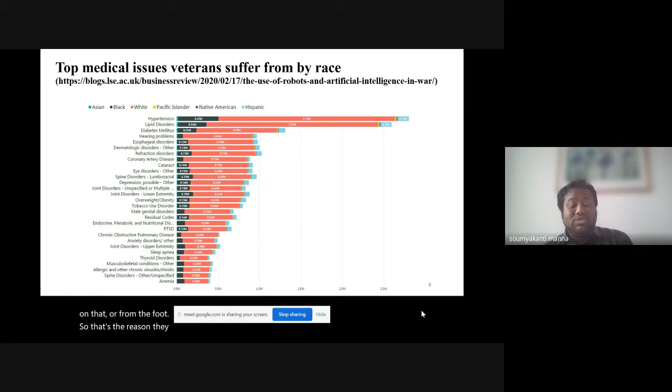At the same time, looking at the cost - to account for the increased lethality of war, a vast budget is required to maintain the active duty army. For example, from the US Army: simply recruiting a soldier costs around $15,000... that's quite huge, almost 10 to 12 lakhs in Indian currency. And the cost of treating an injured US soldier is about 2 million a year - that's from a journal in 2014.

If we look at the Indian military expenditure, last year it was 72.9 US billion dollars, where a large chunk of the Indian defense budget goes towards the salaries of around 1.4 million serving personnel.

So the question I raised at the beginning: can we replace those personnel with robots? Because as you can see, we have to spend a lot of money only for the salaries and for the pension. That's some statistics from 2017.

For example, 67% of the defense budget went towards those heads, and only 33% was spent on new acquisition of hardware and equipment. So then the question comes - if we replace those soldiers with robots...

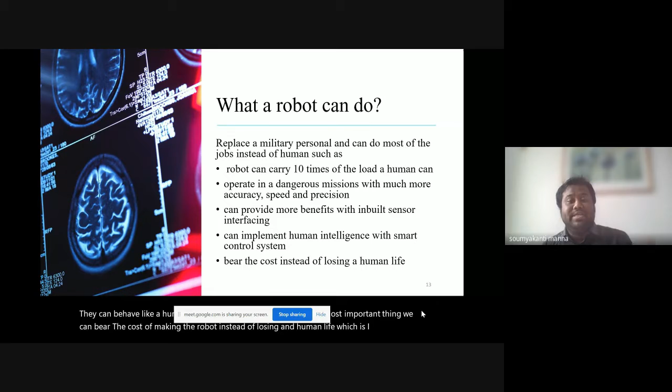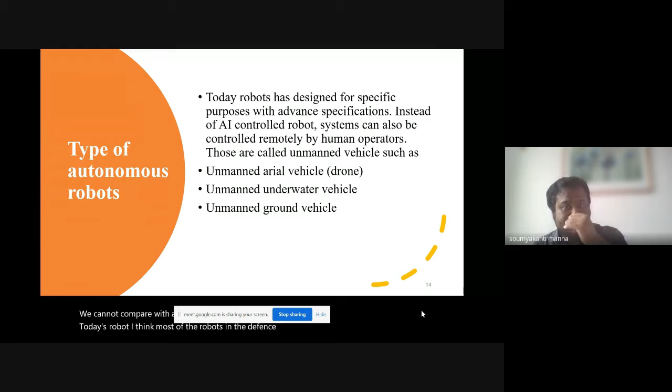Today's robots, most in the defense or security sector, are normally designed for specific purposes with advanced specifications. Sometimes instead of a fully autonomous AI-controlled robot, we have systems controlled remotely by human operators situated somewhere in a ground station.

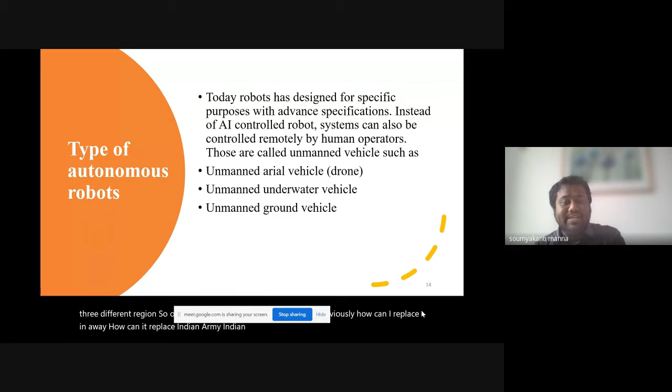We can divide these unmanned vehicles into three types: unmanned aerial vehicle, also called drone, unmanned underwater vehicle, and unmanned ground vehicle, based on three different regions - air, water, and ground. So how can these replace the Indian Army, Indian Air Force, and Indian Navy?

What are the components of a UAV, the unmanned aerial vehicle? There's the communication system, navigation, monitoring, obstacle avoidance system, and weather system. We are integrating a lot of smart features into it so that it can have much more intelligent behavior.

In terms of communication system, it normally uses ultra high frequency and communicates with the KU band system. KU band is the frequency from about 12 to 14-15 gigahertz, normally used by satellite communication. For example, it operates at an uplink frequency of 15.15 to 15.35 gigahertz, and a downlink frequency of 14.40 to 14.83 gigahertz.

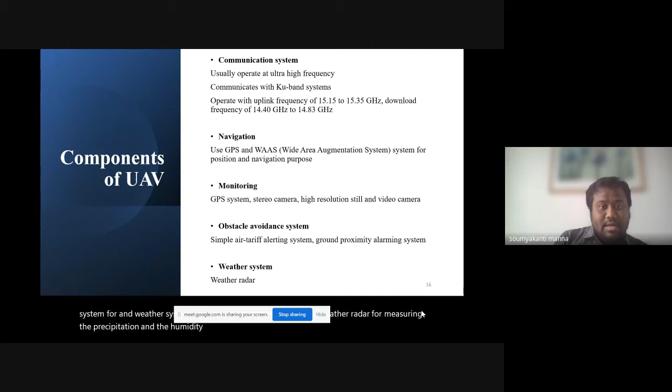For monitoring, we can use GPS, along with a stereo camera, and high resolution still and video cameras. The obstacle avoidance system includes a simple air traffic alerting system and ground proximity alarming system. For the weather system, UAVs normally use weather radar for measuring precipitation and humidity outside the UAV.

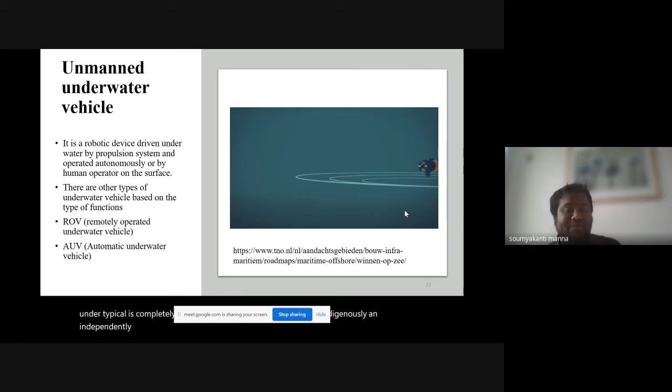So I'm going to play this video.

Deep sea operations can be more challenging than space.

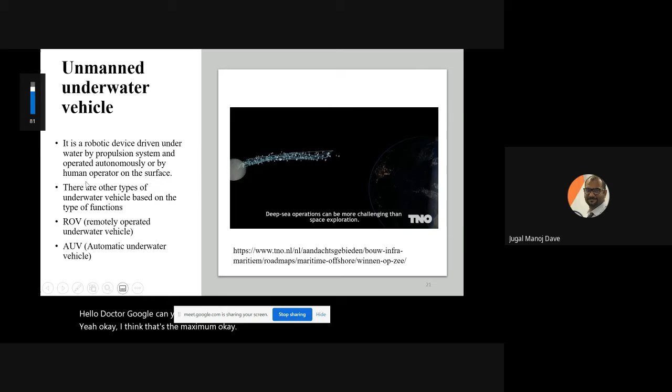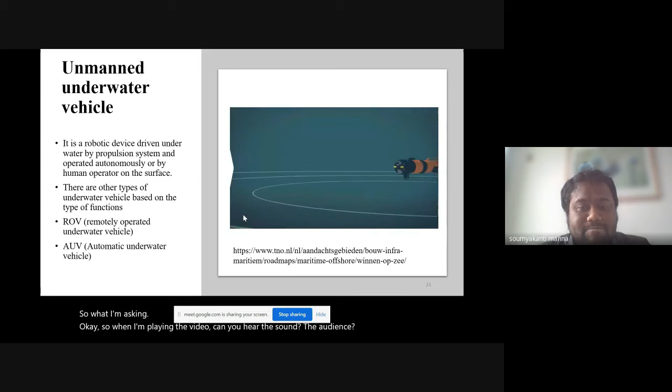Okay, before playing that video, may I ask Dr. Jugal, can you hear the sound? Yes, sir. The thing is, it's a bit low. Can you please increase the voice? I think that's the maximum. But we can hear the voice, so not a problem. Okay, so when I'm playing the video, can we hear the sound, the audience? Yes, yes, yes, we can hear the sound. Oh, okay, that's great.

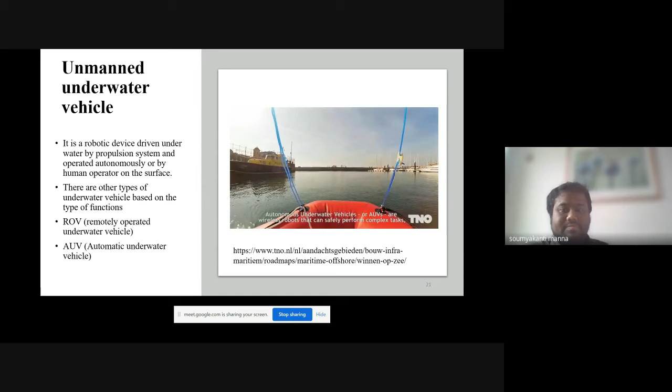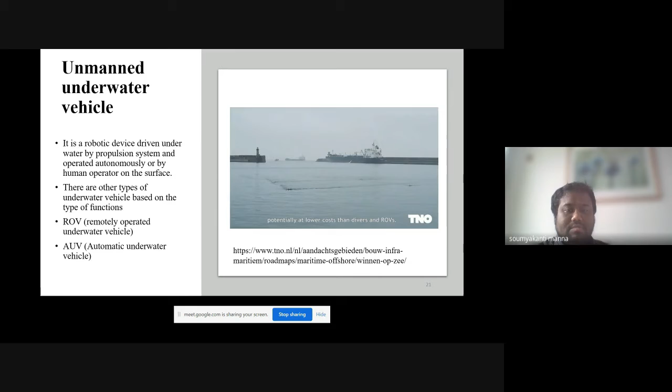Deep sea operations can be more challenging than space exploration. When astronauts sent messages from the moon, there was a 1.2-second delay before they were heard on Earth. Yet when aquanauts sent signals from the Challenger Deep, they took 7 seconds to be received. Only the most advanced technologies can help us explore this complex frontier. Underwater inspection and monitoring are essential for many industries. Operators deploy professional divers and ROVs, but their effectiveness is limited, especially at great depths or in rough seas. As maritime operations expand into deeper waters, more remote locations, or more complex conditions, operators need more intelligent, safer, more cost-effective solutions. Autonomous underwater vehicles, or AUVs, are wireless robots that can safely perform complex tasks, potentially at lower costs than divers and ROVs. At TNO, we apply key technologies that enable AUVs to be deployed for autonomous maritime inspection and monitoring. Let's explore how this works.

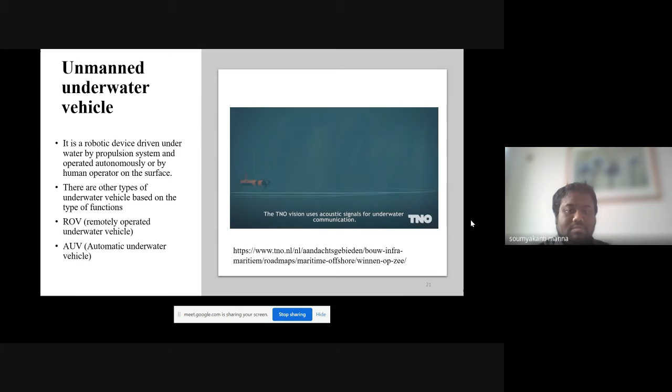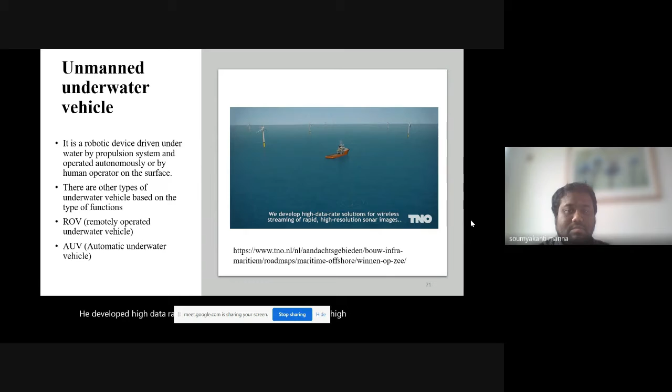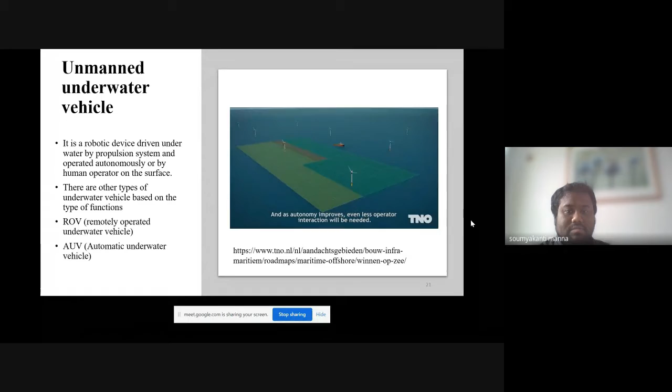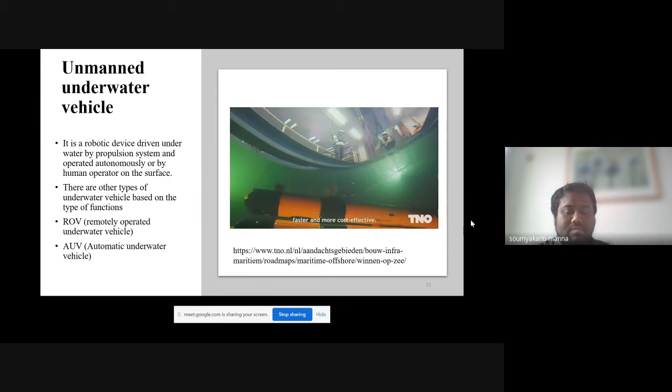The TNO Vision uses acoustic signals for underwater communication. We develop high data rate solutions for wireless streaming of rapid, high-resolution sonar images and compressed videos. We also created underwater modems and designed mission planning software to determine where to best deploy the modems to create a communication infrastructure. Next, we enable multiple AUVs to cooperate with each other. Now, we are ready to begin our mission. We use 3 AUVs to inspect a selected area of the seafloor. If one vehicle fails, another vehicle can take over its tasks, and as autonomy improves, even less operator interaction will be needed. With TNO, you can use the latest technology and AUVs to make your underwater operations safer, faster, and more cost-effective. Are you ready to deploy wireless solutions for your maritime operations? Get in touch with TNO Maritime.

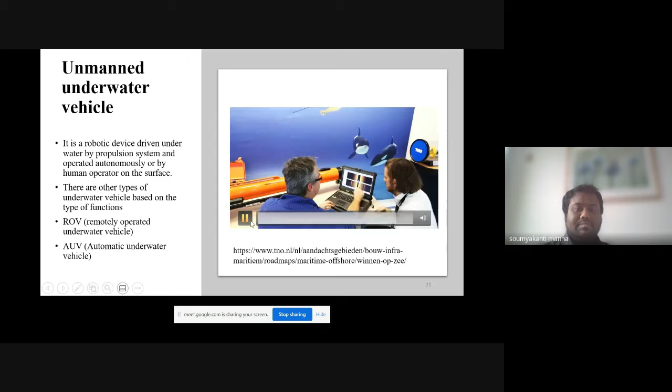So this is the AUV developed by TNO Maritime. I just want to show the working principle of this AUV system. As you can see, it is capable of surveillance, it is capable of monitoring, it is capable of doing small activities. With that advancement of technology, if the AUV can carry more payload, literally like other submarines, we can also launch attacks from this AUV itself.

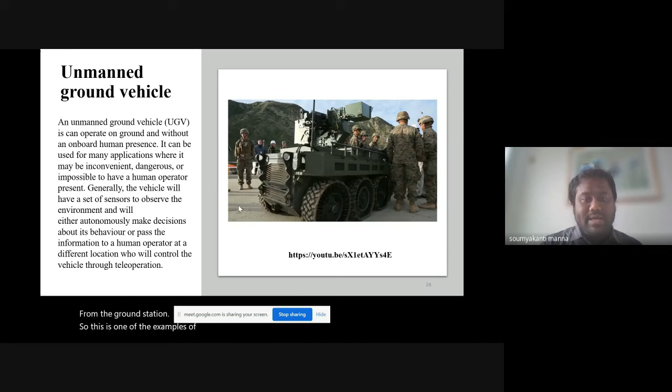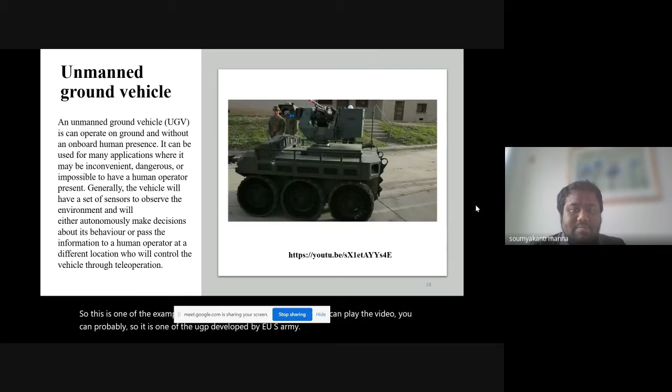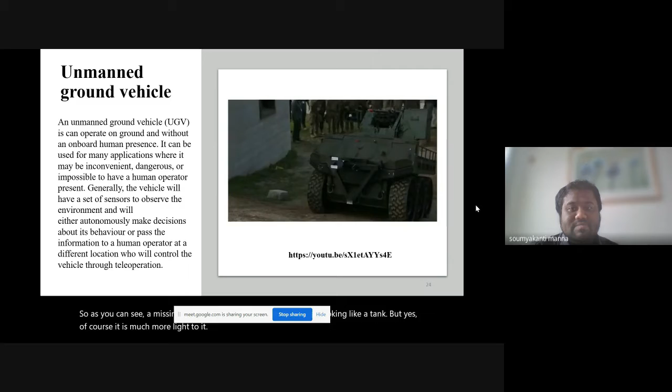I can play the video - this is one of the UGVs developed by the US Army. As you can see, a machine gun is fitted on top, so it's kind of looking like a tank, but of course it is much more lightweight. As you can see, it is remotely operated from an operator. If they have a camera in front of it, they can see the outside and track it as per the requirement.

It can also travel on uneven terrain, since in most cases the war zone and battlefield do not have a smooth surface. So obviously the vehicle should be capable enough to go over uneven and unknown terrain.

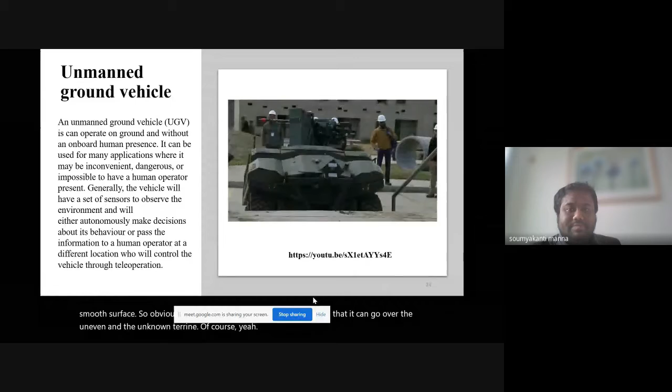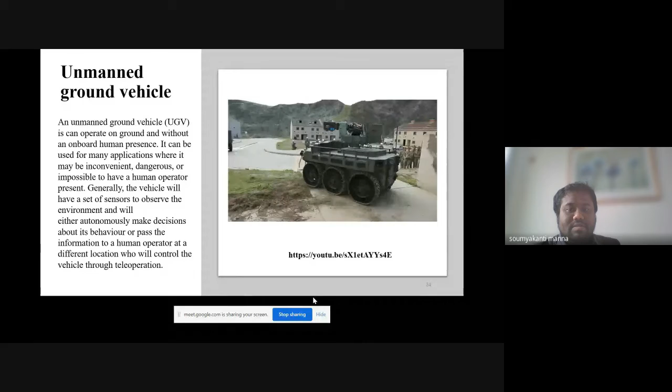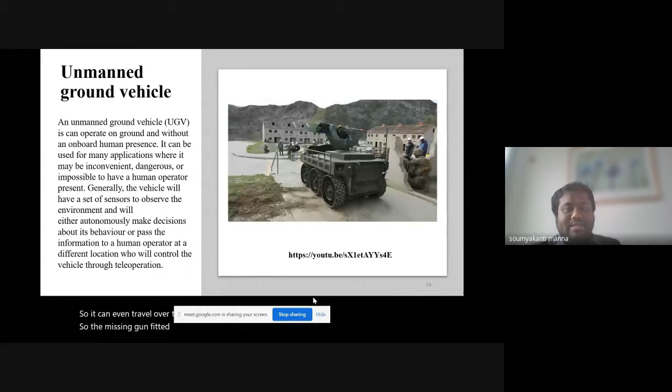It can even travel over stairs, like a human can do. It has a machine gun fitted on top, with another gun in front of it. Then there's an RGB and stereo camera with a radar positioning system.

A few features of the UGV: it mostly has a stereo vision camera that can measure the color image as well as the depth image, so we can also get depth information. Suppose an obstacle or enemy is in front of the UGV - we can measure the distance to it. It has a color camera, radar, radio detection system, and lidar, which is a laser detection system, having more advantage than radar. Then GPS, the global positioning system.

Most of the time it has an onboard CPU, the central processing unit, for mapping the landscape and controlling mechanical activities. If it is remotely controlled, information is transferred by radio signal from an operator through that CPU, and the CPU performs the action. But if it is autonomously controlled, meaning no human operator, the UGV controls itself independently, using a smart algorithm so that based on the situation it can take action.

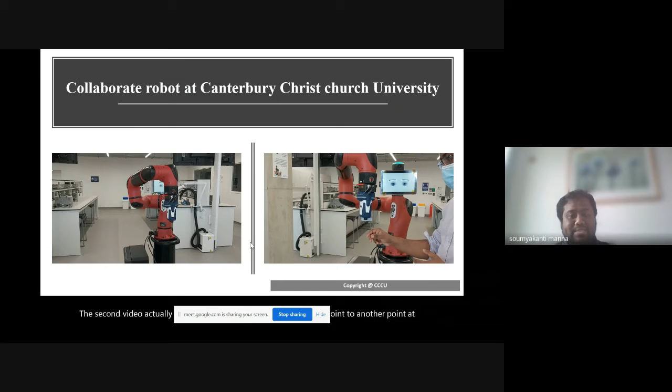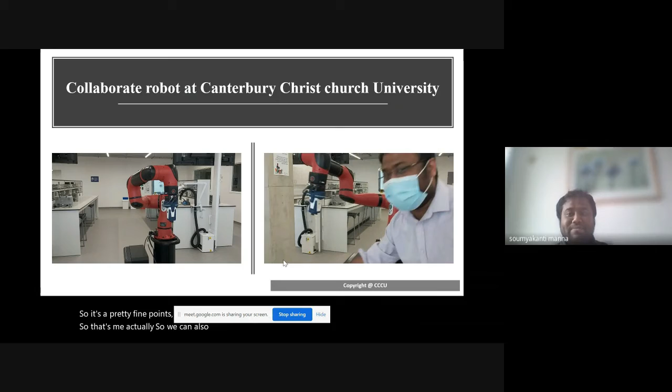Now the second video - it's not only moving from one point to another, at the same time it can pick and place a certain object. It's predefined points, but we can also program it accordingly, like tracking my human arm, my hand position, and it can pick that item from my hand and place it. So that's one of the robots we have.

We have almost two robots - one is this Sawyer robot, and another from Mitsubishi. We can use this even for defense purposes as well.

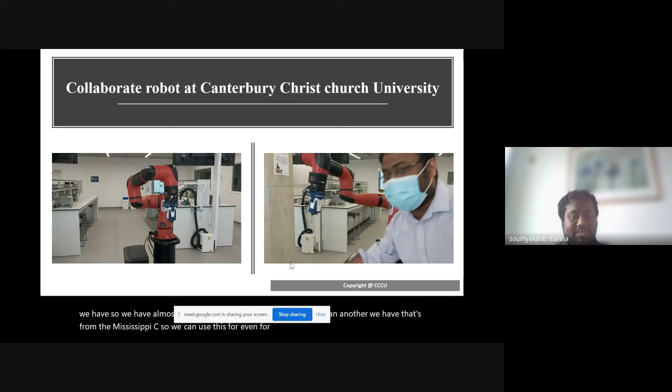If a person can lift, let's say, 10 kg of load, in the battlefield sometimes they have to carry a huge amount of load on their back or front for a few kilometers, or carry their wounded colleagues. For a normal human, your muscles become fatigued after a certain time, become tired, and drop - it's normal human nature.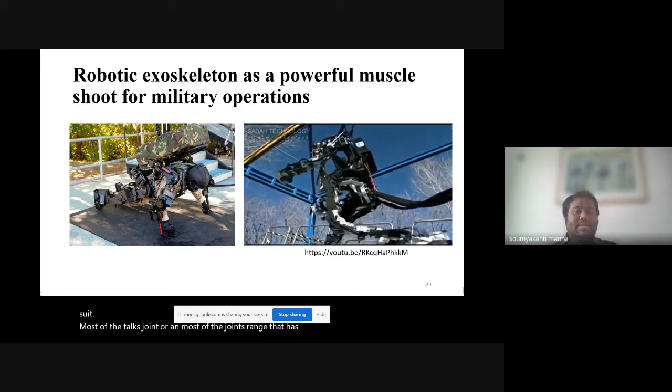But can you use a robotic suit along with you to enhance your strength? It's almost like making you a superhuman. If you can normally lift 10 kg, with this robotic suit on your arm or leg you can lift around 50 kg with ease. Similarly, if a soldier can travel 10 kilometers without tiredness, with this suit they can travel around 50 kilometers, because most of the joint torque and joint range is taken by the outer muscle suit rather than the human itself.

Let's play the video, then you can get an idea how it performs.

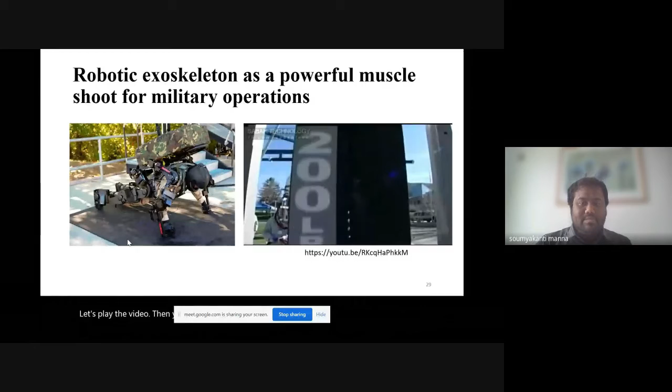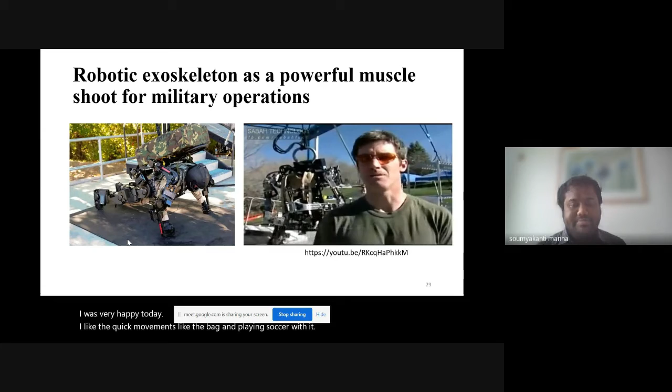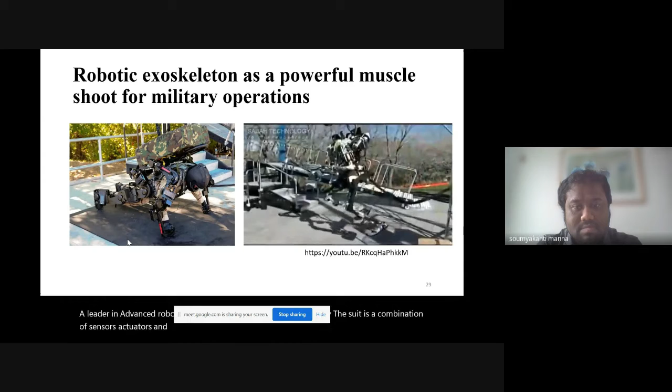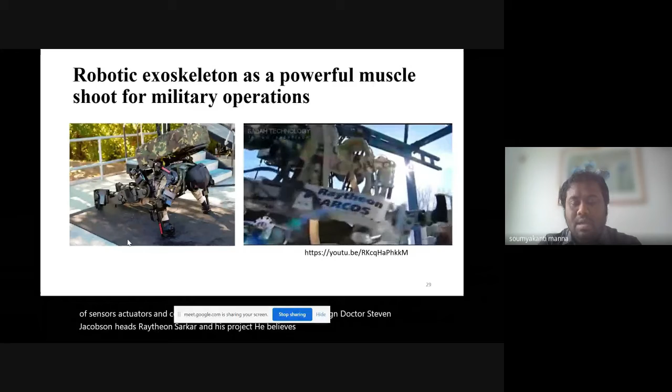Future - not too distant future. This is the exoskeleton, now being developed by Raytheon, newest research in Utah. The exo is a robotic suit that gives its wearer greater strength, endurance, and agility, just like the superhero depicted in comic books and Hollywood movies. Think of the exoskeleton as an amplifier. Raytheon engineer Rex Jameson says it's easy to use: 'It's very natural, you can get it today and walk around. I like the quick movements, like the speed bag and playing soccer with it. And some of the power stuff, it can carry a 150-pound payload, walk up ramps and walk upstairs.' Raytheon Sarcos, a leader in advanced robotics, is developing the exoskeleton for the U.S. Army. The suit is a combination of sensors, actuators, and controllers, all packaged in this futuristic design. Dr. Stephen Jacobsen heads Raytheon Sarcos and this project. He believes invention is a combination of art, science, engineering, and design.

Scientists, whatever, but it's not us—it's a process of getting together, understanding the problems, humans designing something to satisfy the needs. With the exoskeleton, Raytheon is not only satisfying a need, the company is pushing the boundaries of technology.

Science fiction will one day meet reality.

So as you can see, this is a kind of external muscle suit, and that is why it is called exoskeleton. So exo means outside, and skeleton means your human body. That's my research area actually, where I did my PhD.

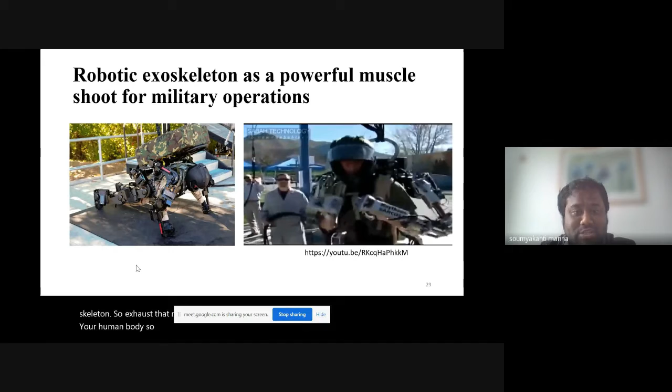The types of exoskeleton can usually be divided into two types. One is the ground-based system, for example Armin, developed by ETH Zurich. The other is the body-based system, for example Titan Arm, from the University of Pennsylvania—a kind of portable system the human can carry all the time.

These are the basic properties of a robotic exoskeleton: the functional properties, the technological characteristics, the financial benefits, and the psychological benefits.

The functional properties involve the structure of the whole body. Suppose we like to create an exoskeleton suit for a human person, we have to think about how the human body looks like.

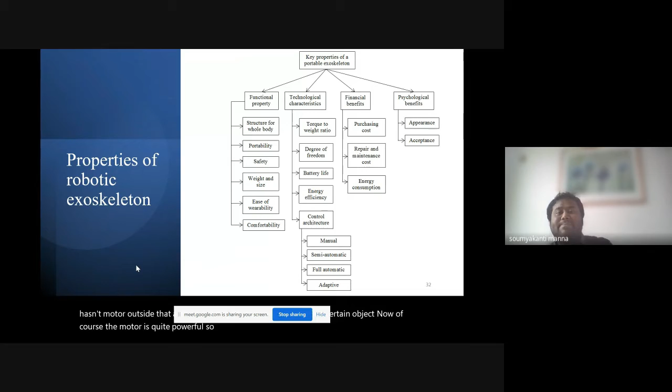Now, the motor is quite powerful, so if any malfunction happens in the exoskeleton, it can even break your whole arm or human joint. So instead of helping you, if something goes wrong it will literally make you paralyzed for your whole life. We have to think about its safety.

Safety in that sense, it should be safe electromechanically and through the soft computing. Electromechanically, we have to think about some limit switches, some boundary conditions in the mechanical actuator. At the same time, whenever we are programming this robotic exoskeleton, we have to program it so that it may not go beyond a certain boundary.

The weight and size matter too—if it is too much weight, even the users cannot carry it, then there's no point developing it. And the size itself needs to fit that human body.

Ease of wearability—suppose a soldier is carrying it for 8 hours long, it needs to be wearable, because otherwise after 1 or 2 hours it becomes painful for the user. They may not use it in the battlefield, because sometimes the soldier needs to spend more than 3 or 4 days outside without food or drink, so the exoskeleton needs to be wearable by them.

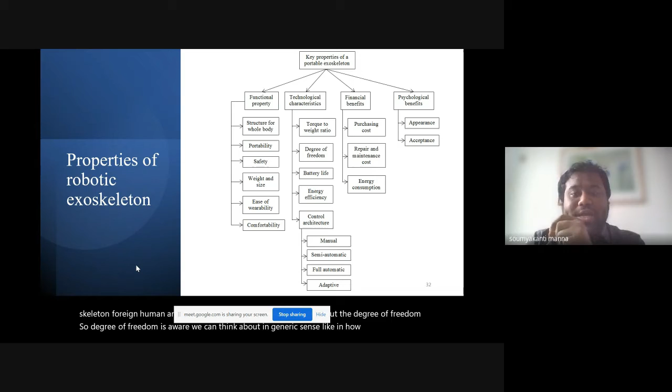Degree of freedom is one of the main criteria. A shoulder joint has 3 degrees of freedom, so it can move in 3 directions. An elbow joint has 1 degree of freedom, meaning 1 direction. So a robotic arm may have 7 DOF. For a lower limb, a hip joint has 3 degrees of freedom, a knee joint has 1 degree of freedom, and an ankle joint has 2 to 3 degrees of freedom. So if we are making an exoskeleton for a human arm or whole body, we have to think about degree of freedom - in a generic sense, how many directions your joint can move independently.

Now, of course, battery life and energy efficiency - because if you are carrying it for, say, 10 hours, your battery should be good enough to provide power to all the motors on the joints.

The control architecture can be manual, semi-automatic, fully automatic, or adaptive. Manual means fully manual control. Semi-automatic means partial manual, partial automatic. Fully automatic means we don't need to think about anything and the robot can take care of itself.

Adaptive means coming with more adaptive nature, adaptive features - suppose the exoskeleton with soldiers is moving towards an unknown situation where they are not even familiar with it. Let's say they are going to the Siachen glacier, where the normal temperature is minus 60 to minus 70. In that case, if the motor does not work and the control system stops working, then what? So the control system should be good enough and adaptive enough to adapt to the unknown situation.

The financial benefit - if we are thinking about a bulk number of items, we have to consider the purchasing cost, the repairing and maintenance cost, because if we are ordering 10,000 pieces, we have to think about that budget as well.

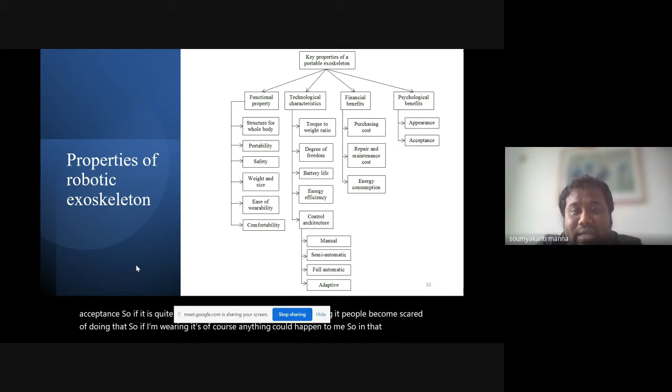Psychological benefits - we normally ignore that part, but most of the time it plays an important role while adopting these exoskeletons. So appearance and acceptance: if it has a quite deadly look, even before wearing it people become scared, thinking anything could happen to them. So we have to give an aesthetic look to the robotic exoskeleton so that at least it goes above the acceptance level.

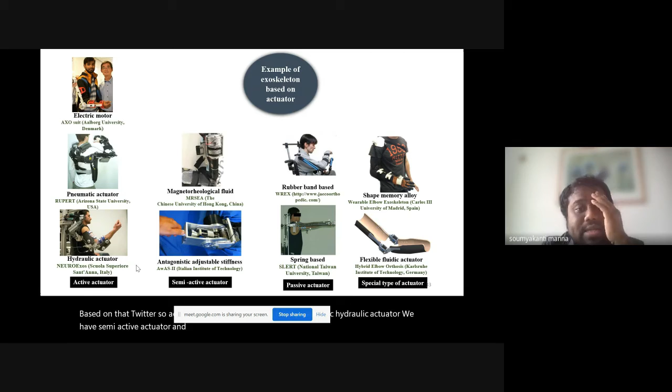This is a type of exoskeleton classification based on the actuator. Active actuators include electrical, pneumatic, and hydraulic actuators. Semi-active actuators are a specific type, like magnetorheological fluid and antagonistic adjustable stiffness rubber. Now coming to the passive actuator.

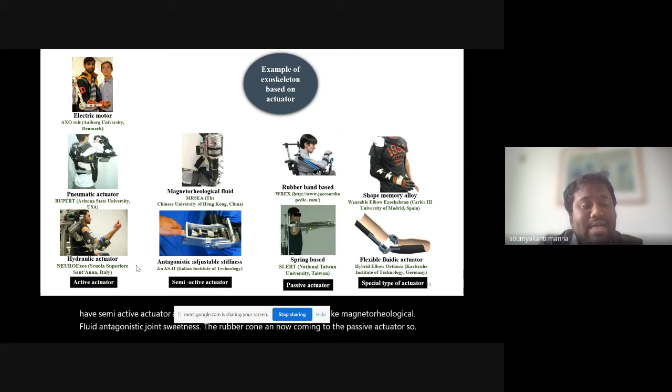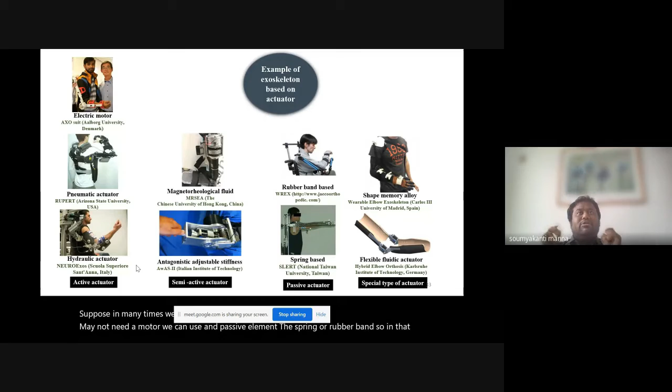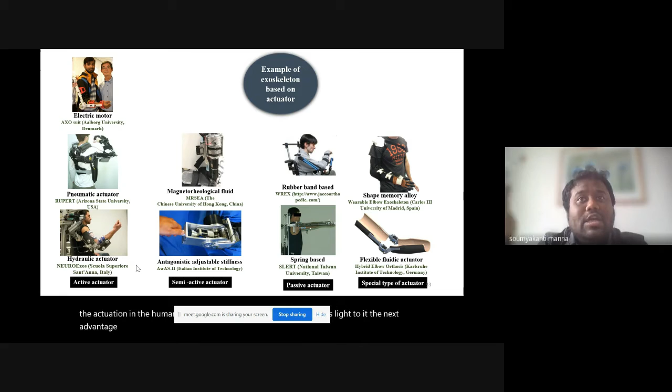Many times we may not need a motor - we can use a passive element like a spring or rubber band. Think of a normal scenario: if we are elongating a spring, it will provide an opposite force, so sometimes we can use that spring force to create actuation in the human arm. The advantage is that it is lightweight, and it doesn't consume any active energy - we don't need a battery or electrical power to give this actuation force to the human body. There are also other types like shape memory alloy and flexible fluidic actuators that have been developed.

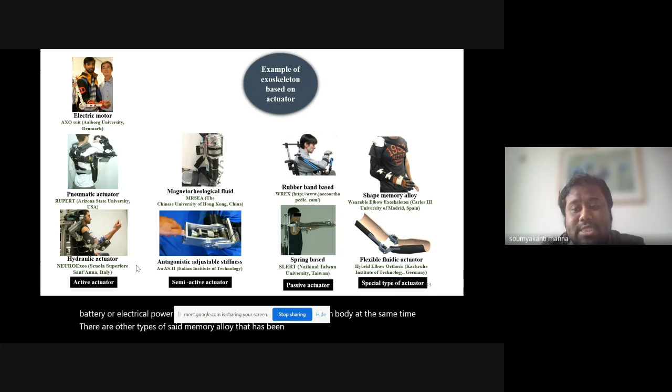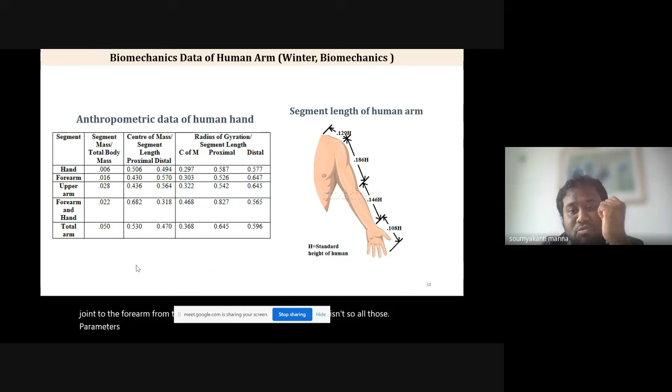Okay, so this is a project that I started during my master's at IIEST Shibpur. That is a 10 degree of freedom human arm exoskeleton. I would like to put that slide here because from that point, I developed this interest of creating this exoskeleton. The exoskeleton can integrate all the joint motion from the shoulder girdle to the wrist joint.

The shoulder girdle has 2 degrees of freedom, the shoulder joint has 3, the elbow has 2, and the wrist has 3 degrees of freedom. It's not that advanced, but it gives you a basic idea because it's purely a master's research project which I have done.

So how can we develop the exoskeleton while considering the human body structure? We can integrate all kinds of joint movements like elevation, depression, flexion, extension, adduction, internal and external motion, like this twisting motion. If you look at my video, look at me, I'm just twisting. That kind of motion also we can integrate using this exoskeleton.

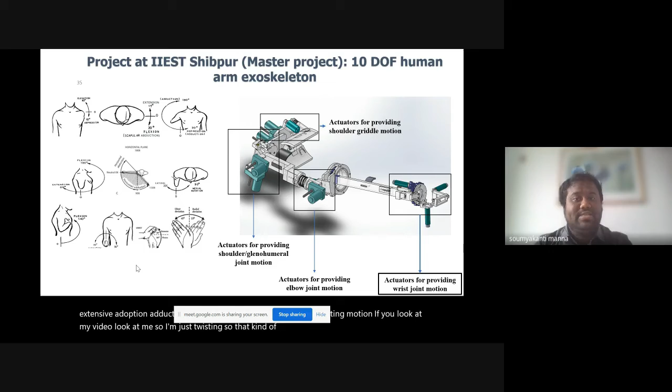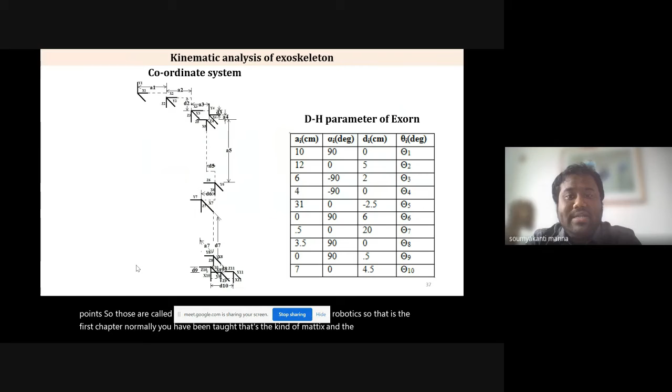You also have to do some kinematic analysis of the exoskeleton, because without it we cannot see in which way the robot can move, what points it can reach, all the dexterous points. Those are called DH parameters. If anybody studied robotics, that's normally the first chapter you're taught - the kinematics, dynamics, and DH parameters of an exoskeleton. That helps you out: suppose if you are moving an exoskeleton, at how many points the robot can reach - that can be analyzed by this kind of kinematic analysis.

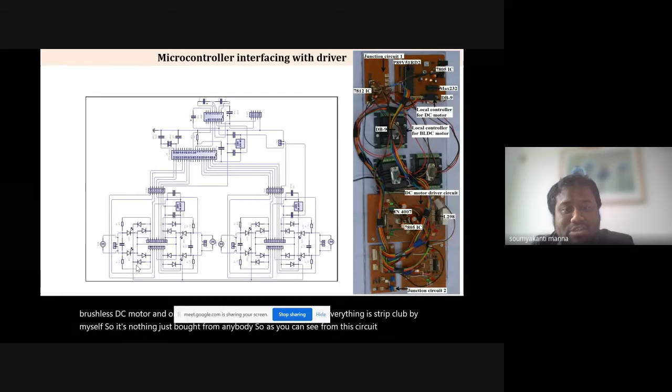This is the microcontroller interfacing circuit. We used a Philips microcontroller circuit and 2 different controlling units, one for controlling the BLDC, the brushless DC motor, and one for controlling the normal DC motor. Everything is developed by myself, nothing is bought from anybody. As you can see from this raw circuit, it's nothing from market-ready software or market-ready instruments.

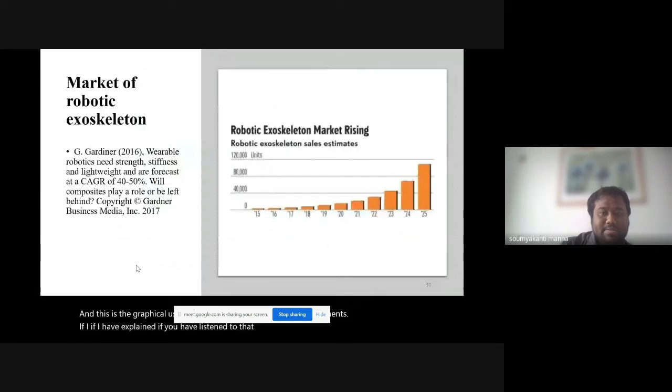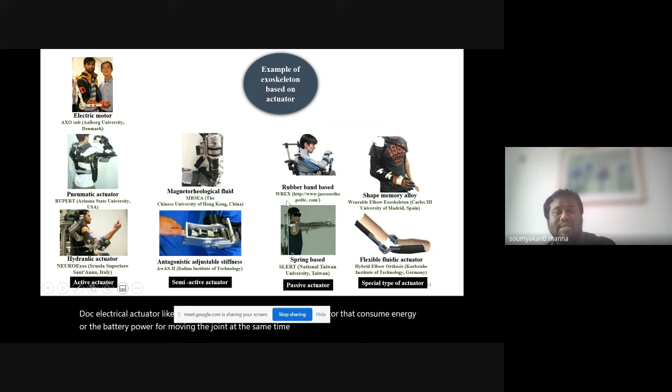As you can see, we have talked about 2 types of actuator. One is the electrical actuator, like electric, hydraulic, pneumatic - an active actuator that consumes energy or battery power for moving the joint. At the same time, we can have a passive actuator like a spring and rubber band, which can provide all the actuation force without consuming any energy.

Now my current research is working in that particular field: how can we create a hybrid exoskeleton by integrating an active and passive actuator, so that we can avail the benefits of both actuators in a single system. Whenever we use an electric motor, of course we need it sometimes, but sometimes we may not need an electric motor, and then there's no point wasting battery power for that. Instead, we can use a spring-powered passive actuator for providing that energy force. This is the way we can create an optimized model of the exoskeleton for better power resources.

This is the prototype of the exoskeleton which I developed back at Bournemouth University in UK. This is one of the journals, Mechanisms and Robotics, which was published, and these are the materials. Most of the components are 3D printed items. These are the dimensions, and the weight is not more than 2 kg, 1.8 kg, with nylon gear materials, and the spring materials are ASTM.

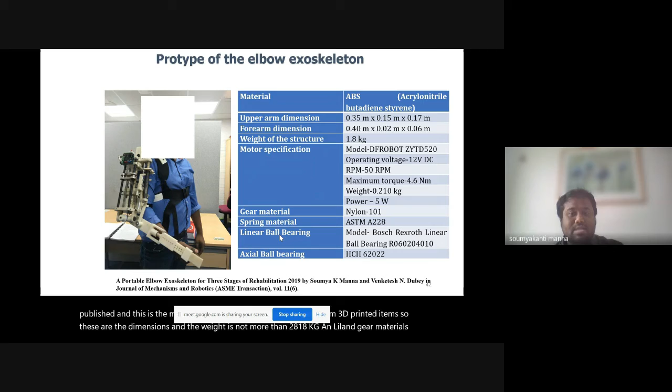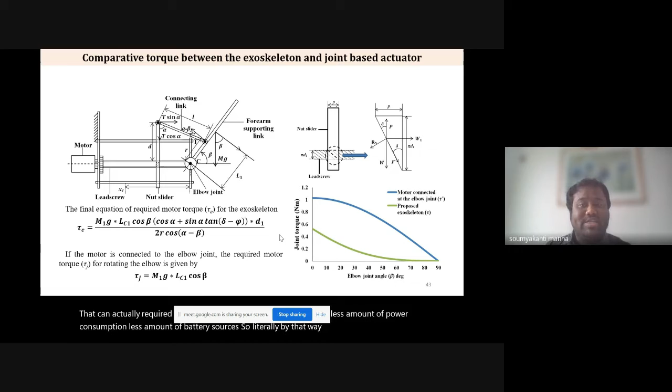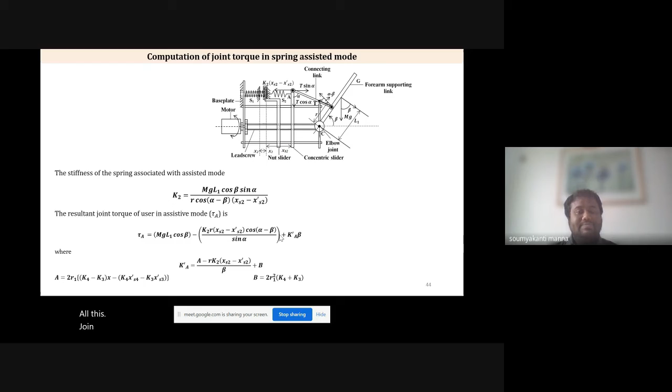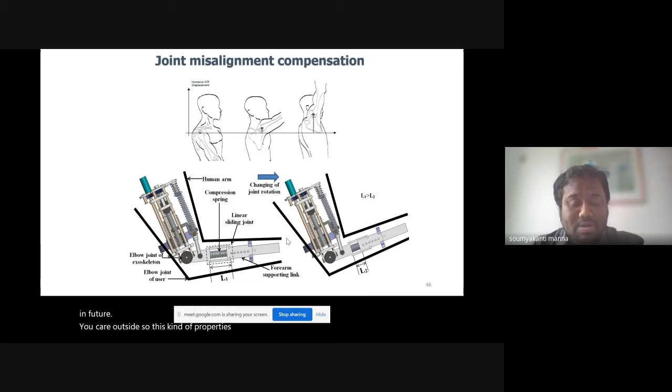I thought it better to talk about all those features, because if somebody from the audience is interested, if he or she would like to create this kind of exoskeleton, probably doing a PhD in future in UK or outside, these kinds of properties you have to look into, okay? Because otherwise you'll face a lot of problems.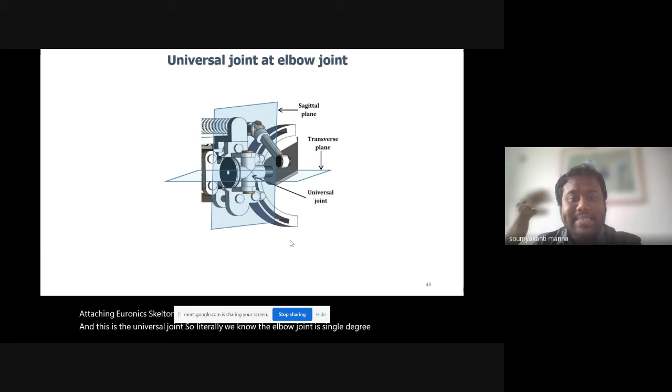And these are the arm supporting structure of the exoskeleton for providing the twisting motion, and the shoulder support for attaching your whole exoskeleton with the shoulder. And this is the universal joint. So literally, we know the elbow joint is single degree of freedom, but still we have used a universal joint so that we can provide some flexibility to the elbow joint.

Let's play the video of the demo. That's my device which I've developed.

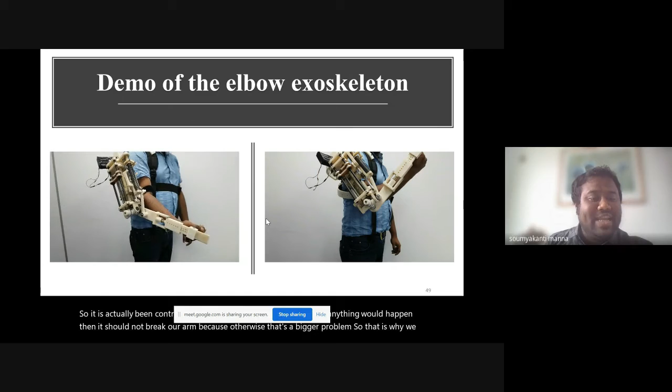It is actually being controlled at very lower speed, because we thought if anything would happen, it should not break our arm, because otherwise that's a bigger problem. That is why we are running it at a very lower speed. And as you can see, the exoskeleton providing the whole joint motion.

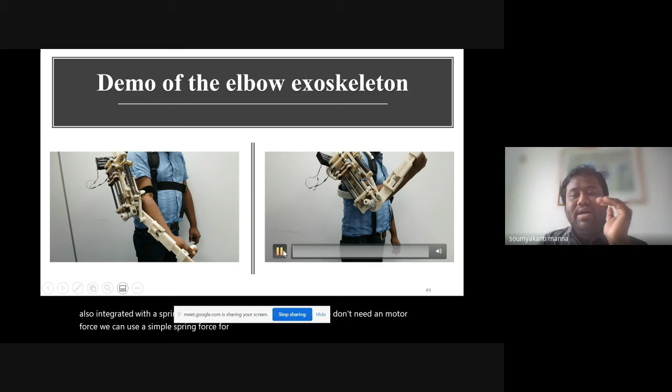Now the same exoskeleton has also been integrated with a spring. So what happens is at certain points, if we don't need motor force, we can use a simple spring force for the actuation. Like what? So you can see this as a hybrid mechanism where we are integrating both the motor and the spring in the same model. Whenever we require motor actuation, we can use it, and obviously the battery power will be utilized. But at the same time, if we want to use this kind of spring power, we probably don't need any battery for that. So we can utilize both actuations in a single model.

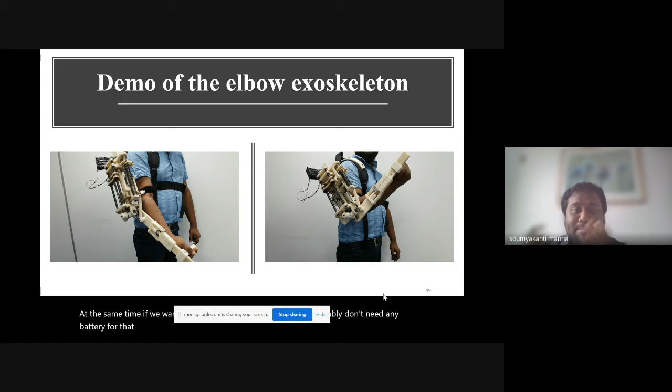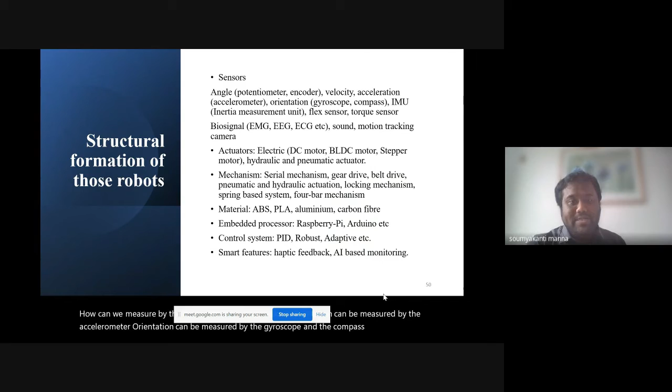And the structural formation of these robots, if we are thinking about sensors, we have to think about a normal sensor that can be used for measuring human body parameters like angle, which can be measured by the potentiometer and encoder. Velocity and acceleration can be measured by the accelerometer. Orientation can be measured by the gyroscope and the compass, and of course the IMU unit. We can use some flex sensor for measuring the bending, some torque sensor for measuring the torque.

Also, sometimes if you see most autonomous systems, autonomous exoskeletons, they sometimes use some biosignal - signal generated from the human body, like EMG, electromyogram, EEG, electroencephalogram from the brain, myogram from the muscle, and ECG electrocardiogram from the cardiac position. So those kinds of biosignal also can be used for controlling this exoskeleton.

At the same time, sound and motion tracking cameras can be used for maintaining its movement. Actuators can be used like an electric DC motor, BLDC motor, stepper motor, or hydraulic and pneumatic actuator. For the mechanism, we have used a slider crank mechanism.

If you're familiar with all the mechanical actuation, at the same time there are other kinds of mechanisms also involved in it, like the serial mechanism, gear drive, belt drive, other locking mechanisms, the spring-based mechanism, and the 4-bar mechanism.

As I'm saying from the beginning, these are the structural formations, and of course this is quite a generic one. So if it is an exoskeleton or any kind of system used for specific purposes, then of course there are more sensors and more advanced mechanisms involved in developing those robots.

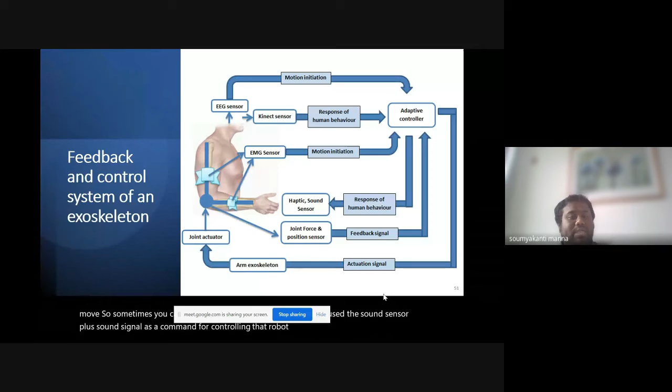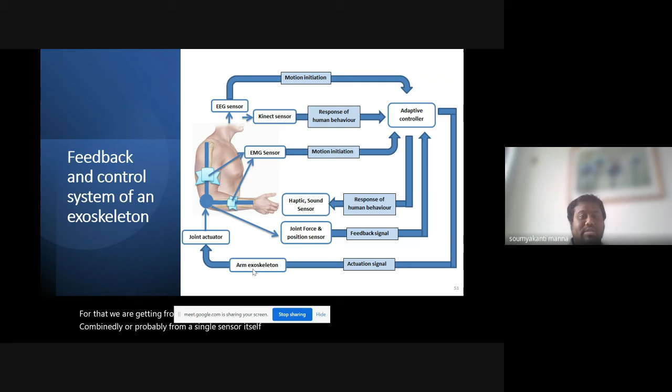At the same time, we need to use other kinds of joint sensors and position sensors to record the joint parameters. All those sensing signals can be connected using an adaptive controller where we record all those parameters, and then we send the actuation signal, as you can see on that figure, to the joint actuator so that we can control that particular joint, whether the user wants to move their joint or not. Based on that initiation—whether from EEG, EMG, Kinect, haptic, or joint sensor, combined or from a single sensor itself—we can control the joint actuator based on the joint signal.

So these are the types of sensors we can use for controlling this kind of exoskeleton, like potentiometer, encoder, accelerometer, flex sensor, EMG sensor, EEG sensor, sound sensor, Kinect sensor, gyroscope.

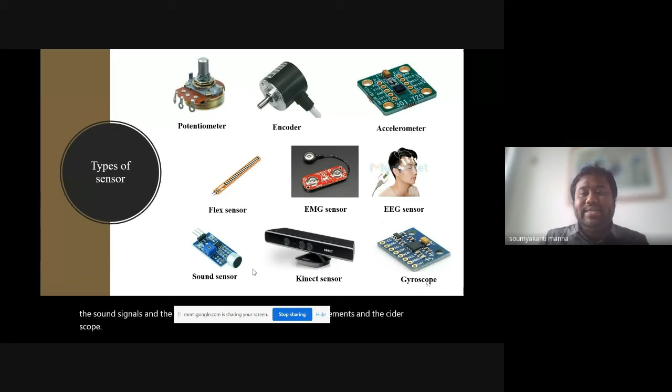I've already talked about the functional properties of the sensors. Potentiometer and encoder can be used for measuring the joint angle. Accelerometer can be used for measuring joint velocity or acceleration. Flex sensor can be used for measuring joint bending. EMG sensor for measuring joint muscle signal. EEG for brain signal. Sound sensor for sound signal, Kinect sensor for tracking all body movements, and gyroscope for orientation and tilting position.

I've also worked a little bit on the Kinect sensor. So how can we track human joint parameters for controlling a robotic exoskeleton? I created an audio-visual game, a basketball game using the Kinect sensor, where it tracks all the body movements and also tracks the voice from the users. It takes my voice and puts it into Windows speech recognition, and we created the whole game in the Unity game engine. From there we are controlling the game with audio-visual interaction, meaning two-way communication.

When I play the video, you can see how the game actually takes the voice signal from the user and also provides some encouraging words. At the same time, we are recording all the parameters of the human joint, like velocity, acceleration, torque, position, and time data using MATLAB and a low-pass filtration technique. Let's play the video so you can get the idea of how this Kinect sensor can be implemented for controlling the robotic exoskeleton.